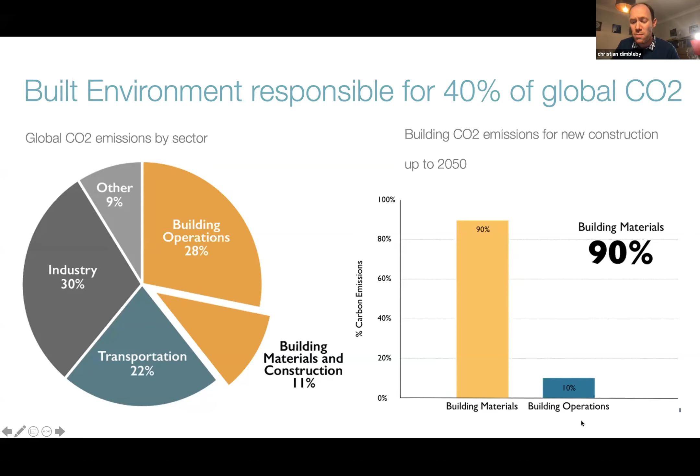And as I said, I'm mostly talking about new buildings. And if we're talking about new buildings being built between now and 2050, when the real issues are going to be occurring, the percentage as shown on the right-hand side from operational energy, all of which is controlled by government requirements, is only 10%. The majority of the impact is from building materials, which is 9 times greater. So I think that's something to think about, and that's not regulated at the moment, but it's something we strongly factor into our designs.

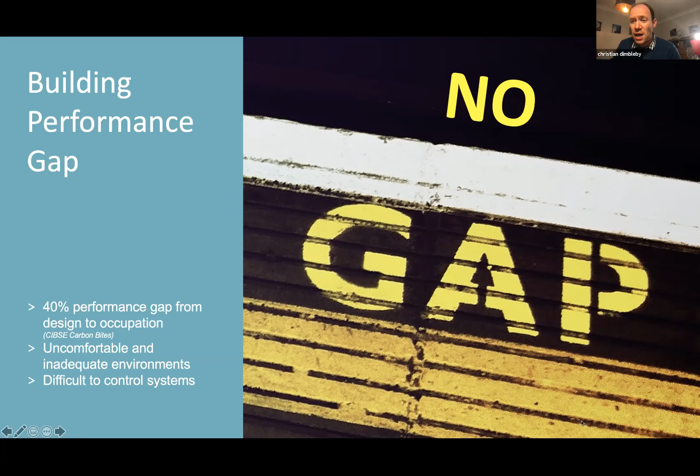Another issue to raise is building performance. Currently, we know that most buildings that are designed don't perform as they should. There's a 40% difference between their designed energy usage and their performance. We know that they're often difficult to control and uncomfortable, and that's becoming even more extreme with hotter and wetter weather, where we're getting all sorts of issues. So we design buildings with no performance gap as our intent, and have lots of POE evidence to show that from monitoring the building in use.

So what can be done to challenge these things? Well, it's a great time to be talking about these things. There's actually the first Built Environment Day at the COP event tomorrow. So please do find out all about all the events that are going on tomorrow.

And one of the great things I would really encourage everyone to look at is the virtual pavilion. This has got 17 really great solutions to really tackling the environmental issues. Please do go on to virtualpavilion.co and you can find out more. There's lots of videos, lots of diagrams and lots of drawings.

I must say I'm really thrilled to say that one of those 17 global exemplars was one of the projects I worked on, the Enterprise Centre at UEA, completed 6 years ago. It's a great project, really pushing the boundaries using natural bio-based materials sourced locally in the Norwich area and designed to Passivhaus standards. And it's a real exemplar.

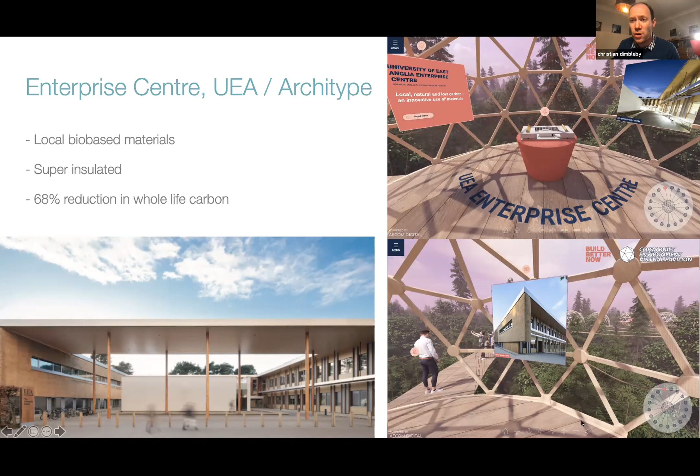You can find out more about it. There's walkthroughs and talks and all about it. And that's one of the things that we've developed there as an international one. And I'm going to come on to some of the really great national award-winning schemes that we've done in Sutton in just a second.

But one of the things that we have done with all of our recent projects is go for these energy efficient buildings to the gold standard of Passivhaus. This means thinking about both form and orientation, making the buildings super insulated, having no drafts or issues, and having efficient services, including mechanical heat recovery ventilation systems, which are very different to a lot of conventional buildings, and then adding on-site renewables on top of this.

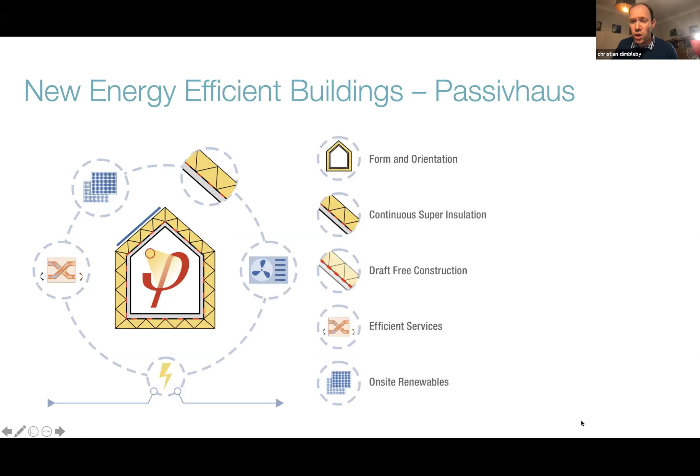Architype helped bring that to the fore in the UK. It's been developed as a standard in the continent for more than 30 years. And we helped deliver some of the first projects and have delivered them right across the country, from large-scale housing schemes to archives to schools, of which I'll touch on 2 of those projects in Sutton in just 1 second.

But one of the other things that has been really great about working with Sutton is their recognition of the wider aspects of sustainability. It's not just about carbon emissions. There are a lot more issues, biodiversity, health and well-being, and all of these things come together. We've had a great partnership working with Sutton Council to really push the boundary on some of these aspects, which we'll talk about now. So I'm going to very quickly talk about 2 exemplar buildings that I've worked and helped design over the last few years in Sutton.

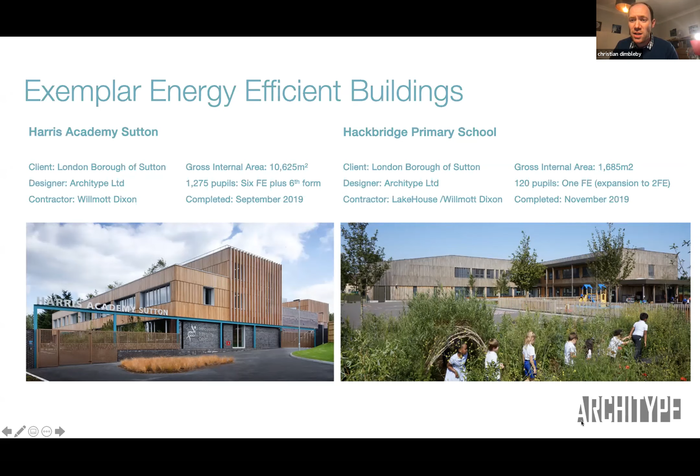So just talking through Harris Academy Sutton. First of all, to make a really energy efficient and low embodied carbon building really takes careful attention to detail on the form and the envelope and the construction. It's really important to make sure you get the design right at the earliest stages. If you don't, it's really difficult to make it work in reality.

So one of the key things is making sure that you minimize the amount of surface area that you lose heat from by making bigger buildings or blockier buildings. You actually reduce the amount of surface area, which means you reduce the amount of heat loss. Your building becomes more efficient by its design. And lots of people don't really consider that, but it's a really important thing.

The other thing is orientation, making sure that you're getting the design in the correct way to show that. And then, of course, construction, designing it in such a way so as to be able to be made from timber or other lightweight and low construction carbon materials.

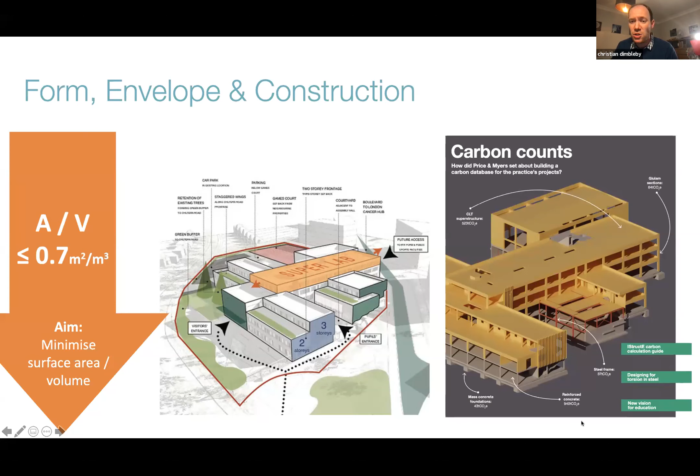One of the other things we did centrally in our design is to make sure that nature is at the heart of it. So we designed it around the existing trees and gave great views out to planted landscapes all around. And we also increased that relationship to greenery and nature by including natural exposed timber walls and ceilings, giving that biophilia, which helps to reduce stress and increase well-being.

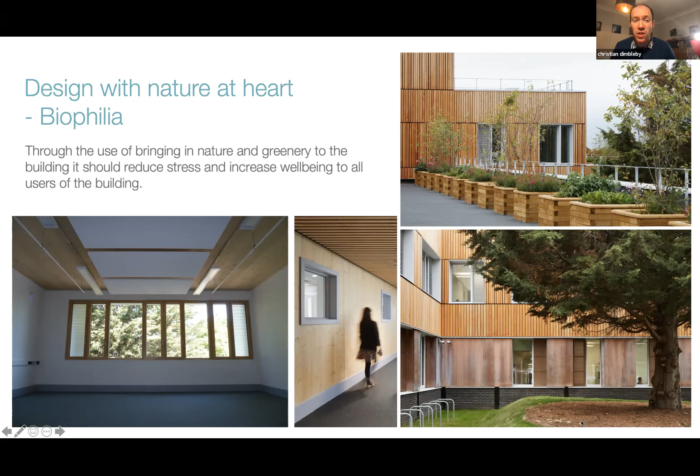Really important in school designs, but especially important more and more as people become, especially in recent times with COVID and other things, stressed, working from home and anxiety more and more. So having a calming place is really important.

The use of natural and non-toxic materials is so important. So many people build things from petrochemical based products, which release lots of toxins, VOCs and other chemicals. We pride ourselves at Architype on trying to eliminate those as much as possible using natural non-toxic products throughout. Here's some examples of the various different spaces throughout the building.

And one of the other things I think it's important to do is to design your building so it's easy to use. As I mentioned, Passivhaus requires mechanical heat recovery ventilation, which is all automatic. But in order to make people use buildings sensibly and make sure that they have control of things, to avoid overheating, we've provided lots of windows so people can open the windows, get natural fresh air as and when they want to supplement it.

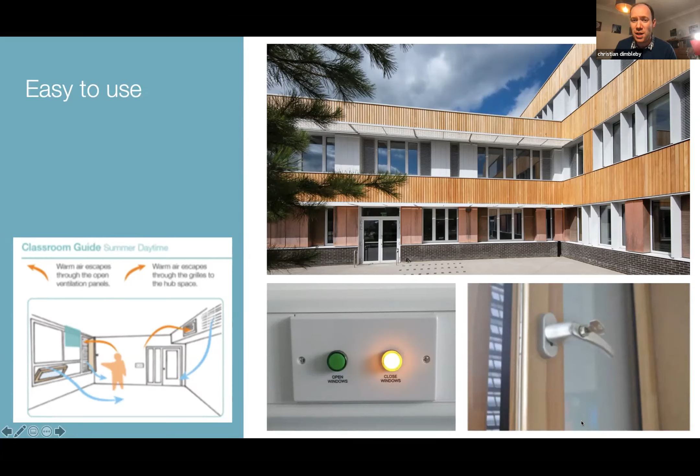But the advantage is that you provide them with simple instructions when it's best to open a window or to close a window, as indicated on the diagram below, and also instruction manuals on how to operate their building efficiently. Doing all of this and combining the careful thinking about daylighting and heat gains means that you can radically reduce the amount of energy that you need.

Here you can see this is a huge classroom and the size of the radiator is absolutely tiny, as you can see, compared to the person. The heating system for this huge secondary school is the boilers are not much bigger than your domestic scale house boiler. There's two of them because one of them's a backup, whereas normally you'd have a whole floor full of huge plant rooms. And you can see that the energy is a display energy rated A.

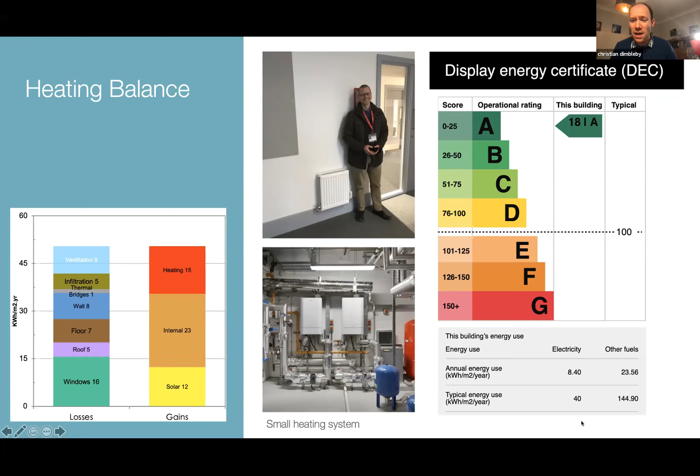It's pretty much 80% reduction in energy compared to typical buildings. This is what we need to be doing, 80 to 90% on all buildings. And the school love it, and everybody really enjoys being in that space.

So the second one I briefly want to just touch on is Hackbridge Zero Carbon Primary School. We started this project before Harris Academy Sutton, but due to complications with the contractor building the building going into administration during it, it actually took longer than the other one. But we completed that at the end of 2019 as well. And that similarly is setting even higher standards on a slightly smaller scale.

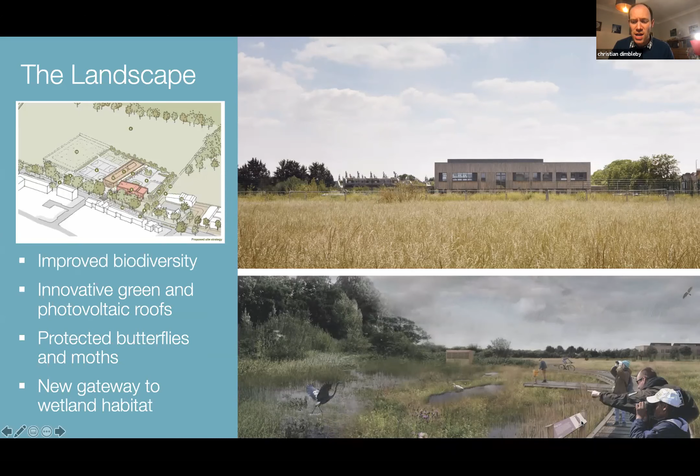So first we looked at the landscape. This is right next door to BedZED, as was mentioned earlier, and we wanted to enhance that site, enhance that natural relationship with BedZED. And so we've really worked hard to increase the biodiversity of that site, giving the building green roofs and allowing access to the new wetlands around it.

One of the things we've done is concentrate on internal environments, making sure that the ventilation system works well to avoid CO2 buildup so that pupils and staff can really concentrate. I don't know whether you can all remember if you've been in an office where the windows don't open and the CO2 levels, after a few minutes, everyone starts falling asleep, and it can really affect attainment.

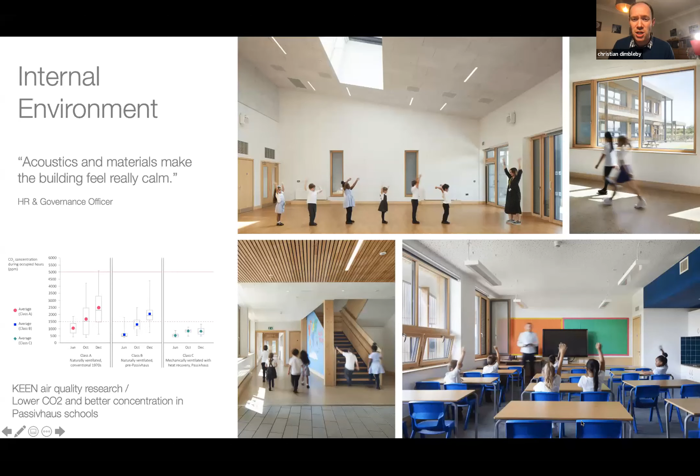So it's really important that when we build these super insulated buildings, that we don't block the ventilation, but that we allow it to work in a heat recovery system so that you can absolutely maximize energy efficiency. And that's one thing that our studies have shown work really well here and in our other schools.

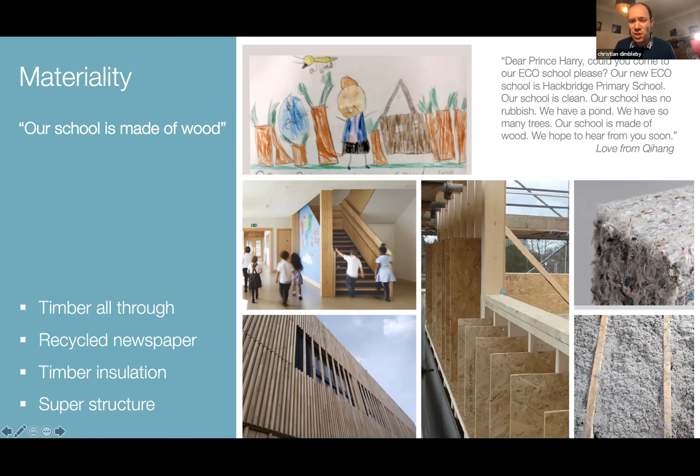As I've mentioned, so much of this is about materiality, not just operational energy. It's about embodied carbon and selecting materials which are low carbon. So the majority of this building is wood. It's timber construction. It uses recycled newspaper for insulation. It's got timber cladding. Everything is wood, and I think that is the way we should be building going forward, trying to reduce concrete to as minimum as possible. Here, that's just in the floor, just as a slab there.

And so, by really concentrating on improving energy efficiency, as I've discussed above, you can reduce the energy consumption down by 80 to 90%, far better than the RIBA 2025 and 2030 goals, which means that it's actually then suitable to use renewable energy technologies to power the whole of the building 100%.

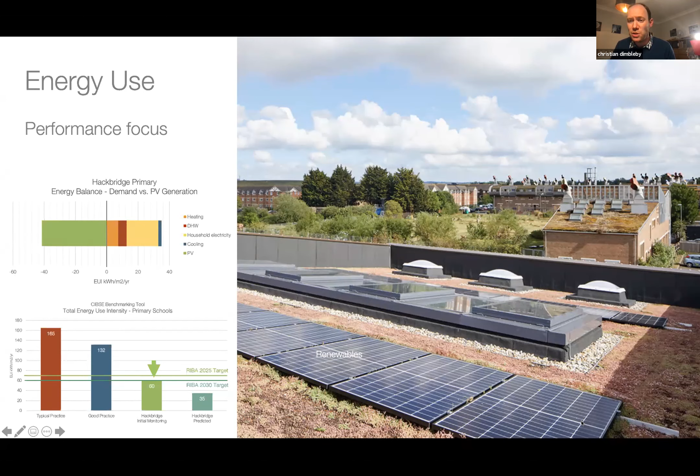So in this simple two-storey primary school, we've been able to provide PVs on the roof as well as a green roof and generate all the electrical needs. We've also got a ground source interseasonal heat pump, which provides all of the heating and cooling from below ground. So this building should generate more energy than it consumes, which has got to be the way we design our buildings in the future.

So thank you very much for the opportunity to really talk about some of these great buildings that are in Sutton, and I hope that's been of help.

Les, you're still on mute.

Les, can you hear me? You're still on mute. Do you want me to jump in with the next presentation? I'm back, sorry. Here we go. I don't know what happened there. The mute for the mic is right by another control and it just flicked the screen.

Yeah, thank you very much for that, Christian. That's what I wanted to say. Really good to see that BedZED's been augmented by another very, very low energy location. I think that was very useful. But we're going to move on to John now, John Warren, and look at refurbishment of housing. That's correct, isn't it, John?

That's absolutely right. Yeah, and hopefully you can see my screen. So good to meet you all virtually, and thanks for having me on. We've got a couple of live projects in Sutton at the moment. I thought I'd tell you a bit more about EnergieSprong and what we're doing with the projects in Sutton.

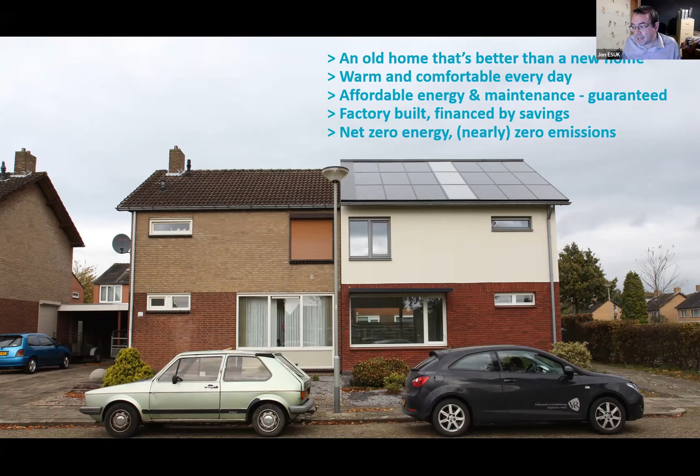Factory built, so really high quality and modern methods of construction, and able to be financed by savings. And of course, we've got to be net zero energy, and very nearly net zero emissions. So really, how can we get all of that using some of the approaches in other industries? And off they went in 2010 and built some of those pilot homes, and this is a project in Arnhem that they built in about 2016-17, hundreds of houses. You can see them being put together there, and really expanded into a number of different sectors.

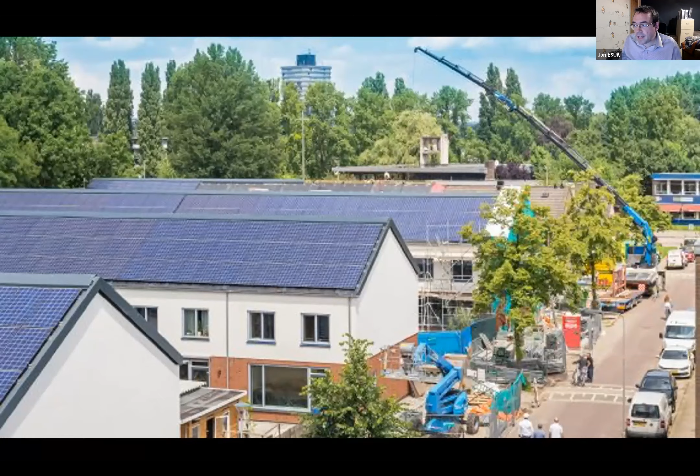Here's a multi-story housing project, also net zero, that completed a few years ago, and they've completed 8,000 homes under the EnergieSprong approach now in the Netherlands, and there's teams in France, Italy, Germany, and over in North America doing similar stuff to what we're doing in the UK to try and scale up retrofit.

So closer to home, you might have seen pictures of this project that we completed in Nottingham. That was completed with Nottingham City Homes, so a bit like Sutton Housing Partnership, an ALMO, with their builder, an SME called Melius Homes. 10 completed homes in 2018, another 46 added last year, and hundreds to follow. So really, using that original design and repeating that and scaling up in Nottingham quite nicely.

Another project over in Essex, 5 homes, some technical pilots completed under some quite stringent planning rules here. So we needed to complete the homes and make sure that they look as close as we could make them to the original homes, whilst hitting the net zero standards that we need to get to. And then there was another batch of homes, some more social houses over in Devon, 3 landlords over there, 16 homes that are now completed, and there's another phase of work underway there. So back to Sutton.

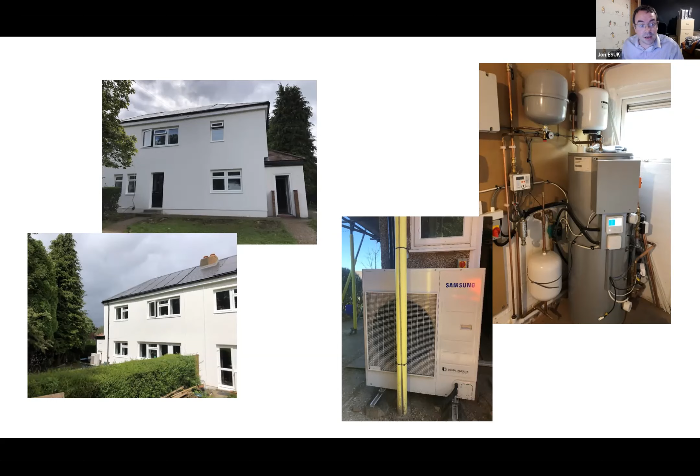up in Coulsdon. Moving on, so we're going to do a follow-on up in Coulsdon, another 15 homes, just to test kind of a version 2 of the product, and start getting the cost of the solution down.

Moving over to the St Helier estate, these are some more prototypes that we are now on site with over in St Helier. I think Sutton Housing Partnership has over 2,000 homes on that particular estate. We're starting with 6 technical pilots and hope to roll to a further 60 homes next year.

These are smaller houses, so you know, space is even more precious. So we're using a kind of pod design for the front of the home there, which will obviously provide a small porch area, but with some of the equipment in there. All of the low carbon equipment, so the PV inverters and the heat pumps. So everything's in that pod. So we're not taking away any space from the resident. So those are going live as we speak for the first technical pilots, and then we're rolling out with some scale next year.

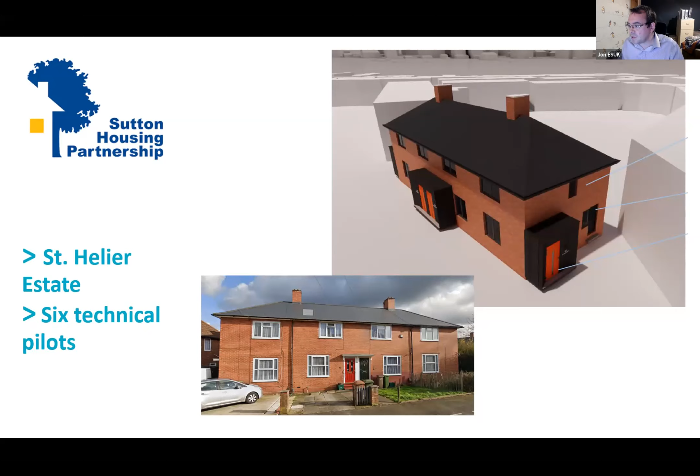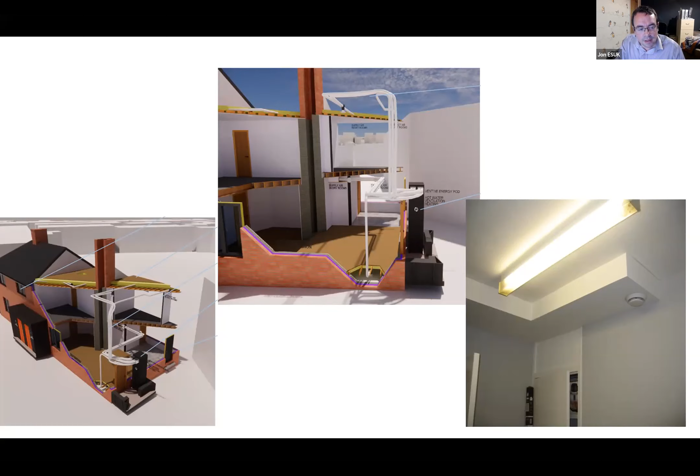So how are we doing this? Going back to the approach, we've got a performance specification. So we're asking the market for a completely different product here. We're asking for a very, very high level of performance, and we're saying to the supply chain, look, we need the quality. We don't want to intrude on people. It needs to be affordable, and we need to get that design factor right. So the neighbours are jealous, and this whole thing scales up. And there's no barriers, or people really want and desire to have this retrofit solution.

So we've set a really high performance standard, and encouraging people really to move to a way of thinking about a retrofit as a product rather than a series of trades or a series of measures that are fitted to a home.

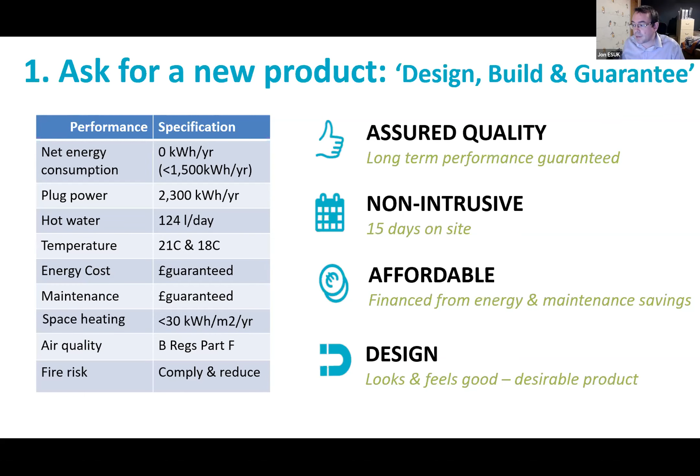Key focus is a focus on people throughout. So we need to change to be able to offer a product that people want. So we're very clear that they can heat their home to 21 degrees all year. They get 40 minutes of hot water for showers. They get a plug load allowance to run their appliances, and a guarantee that the home's going to feel good and sound good. So there's not going to be any noises from any of this new equipment we're putting in.

So we're going for guaranteed comfort, and we're going to be taking out gas completely, and applying a fixed monthly cost, and they'll still remain in control of their electricity bill, but they get this absolute guarantee that they'll never pay more than they did before, and normally people end up with a slightly warmer home too.

Business case: so we're working with social landlords exclusively at the moment, whilst we get that scale going and reduce the costs. And this is how we're doing it in terms of the business case. Before, tenants would pay their rent to the housing provider, or Sutton Housing Partnership, and they pay their energy bill to the utility company. And then every so often, Sutton Housing Partnership would come along and replace doors, windows, redo insulation and other parts on the home.

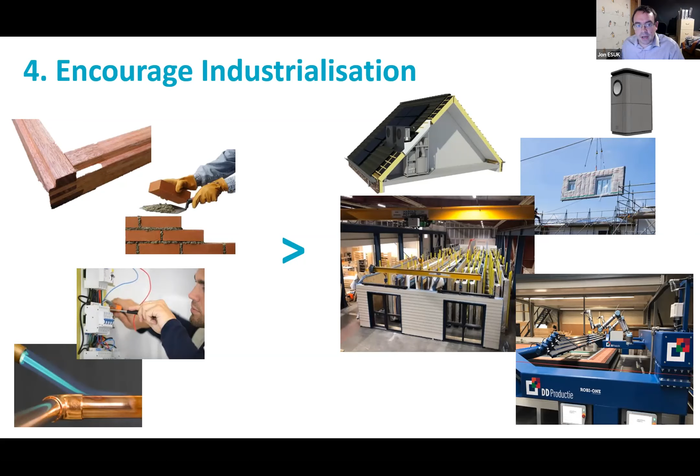And then additionally, we're encouraging people to move to more industrialized methods of production. So I think somebody was quoted the other day saying we need 1 million more skilled jobs for retrofit, but with the EnergieSprong approach, sure, we're going to need more skills, but we're trying to move as much of the production into factories as possible, so it's more productive and there's less of this demand for new skills.

And then finally, this is where we're at the moment. We're trying to start the market and create that early market, and we're working with progressive landlords such as Sutton Housing Partnership and another 6 or 7 boroughs across London and wider across the UK. We're working with the supply companies to challenge what they're doing and build production capability to create the scale we need. And then we're also twisting government's arm as well and saying, hey, we need a more ambitious standard for retrofit.

We're going to need some money to get this off the ground, and we're going to need some policy changes to make sure that we can really push this beyond the social market and expand into the private sector. So that's it from me, and that's all about EnergieSprong and what we're doing in Sutton.

Thanks for that, Jon. I'm not sure whether we've got Russell with us yet. Yes, I'm here. Oh, hello, Russell. Have you heard some of that last presentation? I heard the whole lot. The whole lot? Oh, thank you.

Well, Russell is our last speaker for today, and he's looking at not-for-profit cooperatives to provide retrofit work in the UK on a grander scale. Hopefully, he's learned something from refitting his own home, and he'll pass on some of those tips to us tonight. So I'll hand it straight over to you, Russell.

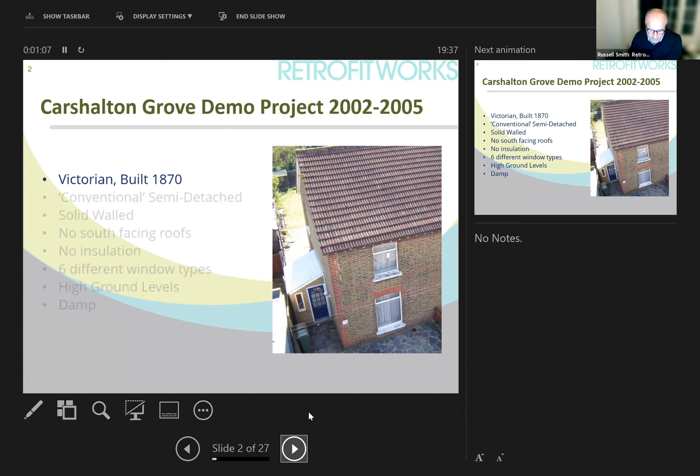Actually, you're probably looking at the notes screen here, aren't you? So I'm going to swap them over. So in essence, there's a whole bunch of things in this particular property, which I'm going to stop sharing and share again.

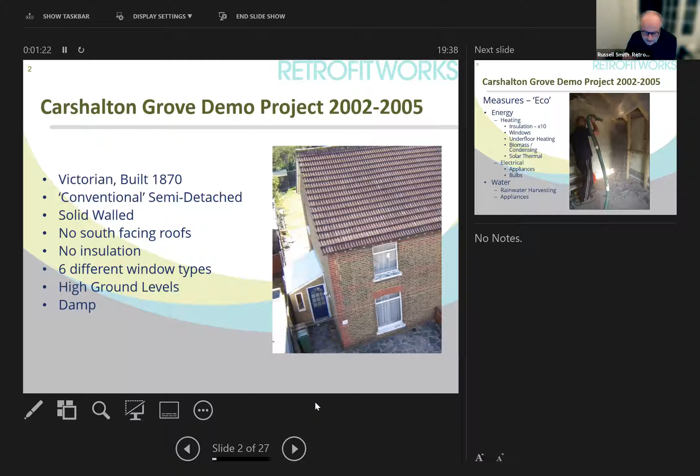Now I wanted to test a number of things out, and at that stage it was just applying a lot of different things, putting some monitoring equipment into the building and really understanding how it would all work for the long term, including costs, ability to install it, the capability of a local supply chain to understand what I was talking about, that kind of thing.

And through the course of doing this work over 3 years, I had about 3,000 people come and look at the house. You kind of put these things together and you realize, oh, okay, there's a whole bunch of people that know nothing about it, but are really interested in it. Well, there's a business here. So I started my own company called Parity Projects, which is still kicking around. And we started advising homeowners on how to do this kind of thing.

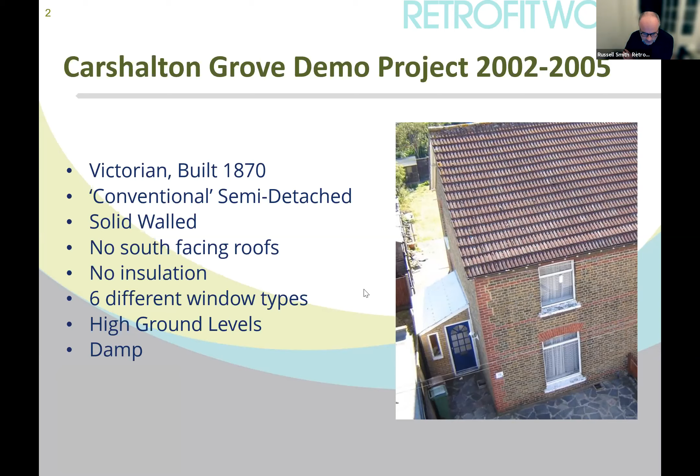To give you a flavour for the sort of things that I did in the building, lots of different types of insulation, new windows, underfloor heating. The photo here is of a maskless recycled newspaper sprayer, spraying the wood fibre in between the timber joists that I'd installed at the time. There's a biomass boiler put in there, solar thermal on the roof. And I didn't ignore the fact that water is an issue.

At the time, Sutton and East Surrey Water and Southeast Water were wasting around 90 litres per head per day just from leaks, and the target for total use per head was 90 litres per head per day. So we were having a go at trying to do as many things as possible. So I actually reduced the water consumption, and there was a meter installed the day I moved in. Reduced the water consumption by 90%, and I got my heating bill down to £50 a year.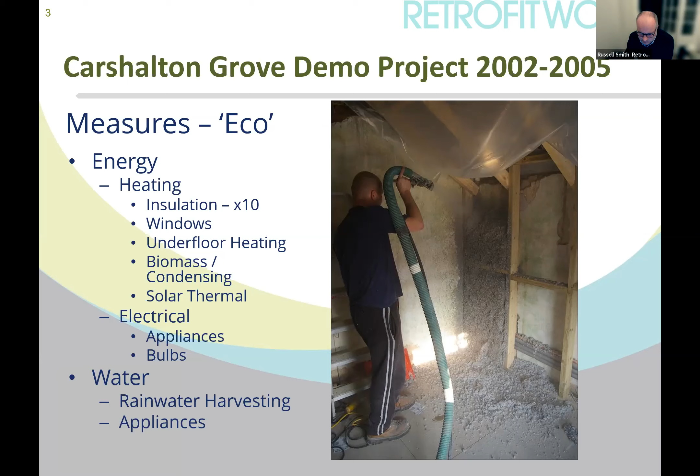And it was really just through working it all out for myself, and a very embryonic piece of software to work out what I needed to do, that really put me on the road to starting things off. And there's a picture of that particular room, typically at the back end of a Victorian house, you'll see a sort of an outleg of the house, but it's just insulation. That's how these buildings need to be treated.

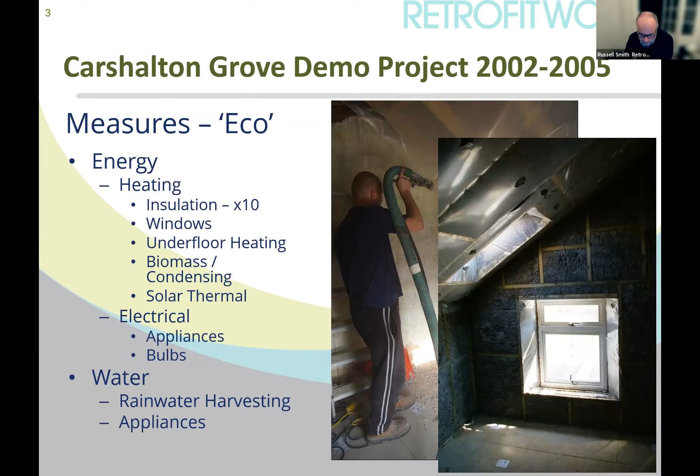Sadly, I know there's been some requests. This isn't a training course on how to renovate a house. This is a talk on how to get every house in the country renovated. So the philosophy is taking this approach, and that's the beauty of how we can, as long as we understand how the building's performing right now and what it could be. And to some extent, you've got to take some notice of how people would like to use a building, but they may move, so the next person might have a different lifestyle. We can think about how to take things forward.

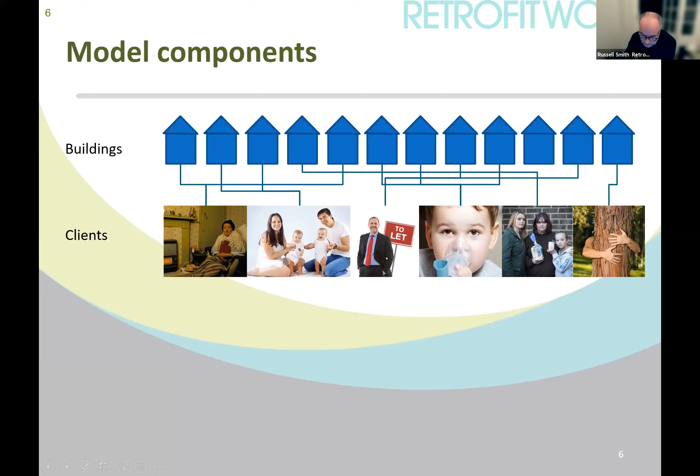So Retrofit Works works on the basis that you have a bunch of people that represent householders for what their motive might be. So there are some people that are cold, they just need a house that gives them a right to live in a comfortable home. Some people, they're moving on, they want to renovate, they want to invest for the long term. Some people have health problems, some people want to save the planet. There's lots of different reasons to install a bit of loft insulation.

So why don't we engage with them in the way that they want to be engaged with? And all those people can be a variety of organisations out there that meet them at the moment that they're willing to listen to the advice.

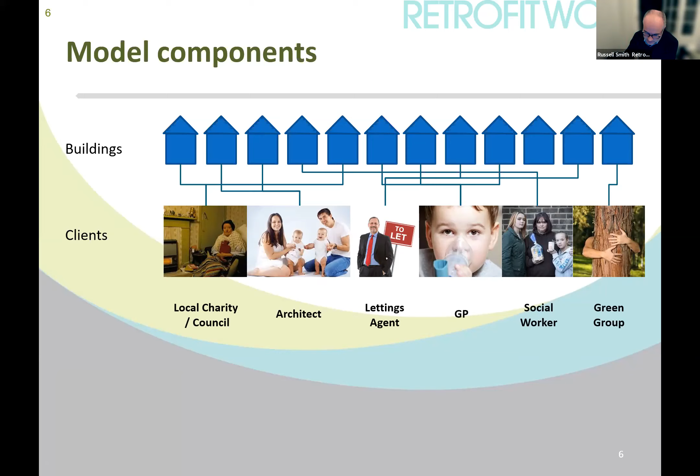The supply chain, we call them vetted. The practitioners can't join our co-op unless they can prove that they can actually do the work, or they're willing to go through a series of training courses that we've got for them to get to the point where we're willing to give them some work.

And then in the middle of all that, we put machinery, we've got an online tendering portal. So in other words, if a customer comes to us and wants some loft insulation, we could go out to three to ten local companies through our platform. We've got access to finance and grants when they're available.

And we're working on some low interest finance with a couple of banks right now. And we've got access to regular CPD training. And now Retrofit Works is an accreditation scheme as well, so we are able to accredit retrofit coordinators to work in this space as well.

So the model works because the practitioners and advocates own the cooperative; we have an open book policy to the way we charge. In other words, we agree a percentage of the value of the work that goes through, and Retrofit Works effectively invoices contractors to that agreed percentage across the retrofit scheme.

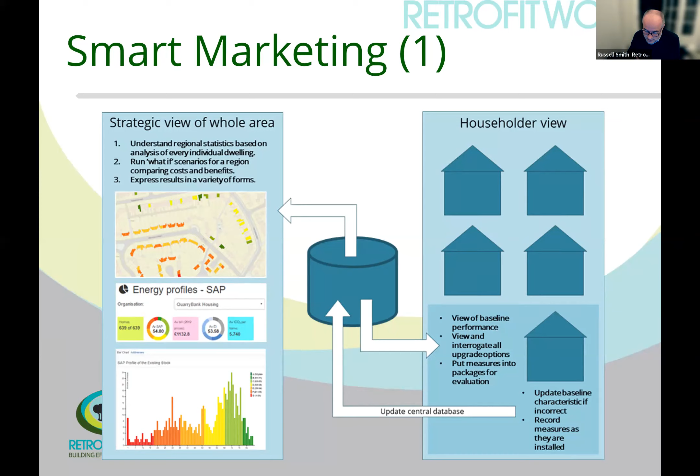In addition, to give you an idea of the sort of properties you've got here, this is just a map of Sutton and the number of properties you would get within what's called lower super output areas. So groups of 500 or so dwellings, but the density gives you an idea of the density of the properties we've got here. When you talk about density, you might be wanting to talk about not just insulation and swapping a boiler, you might be talking about district heating as well, and how you can lay pipes in the road to have one big boiler or one big heat source, or ground source heat pump or whatever, to hit a number of buildings, which makes those buildings much more effective to get towards net zero.

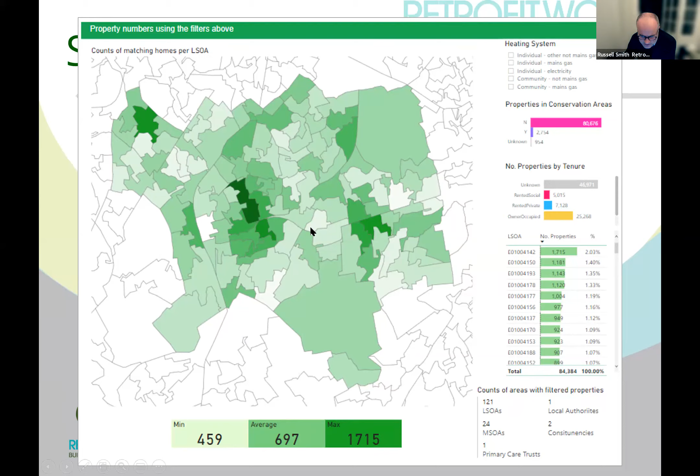Draughts and ventilation here. There's a good sort of £8 to £9 million worth of draught proofing and ventilation to be put into buildings right now as well. So that's all there and available. Given this is being recorded, I'd urge you to go back and have a little tinker with some of those.

But I just want to give you a little flash through about our online platform. So if you go to our London service, ecofurb.co.uk, you'll be able to look at what we call Plan Builder. You can log on to your own property, put your address and postcode in, see what measures have already been put into the building. If you've done more than the software says, you can update it.